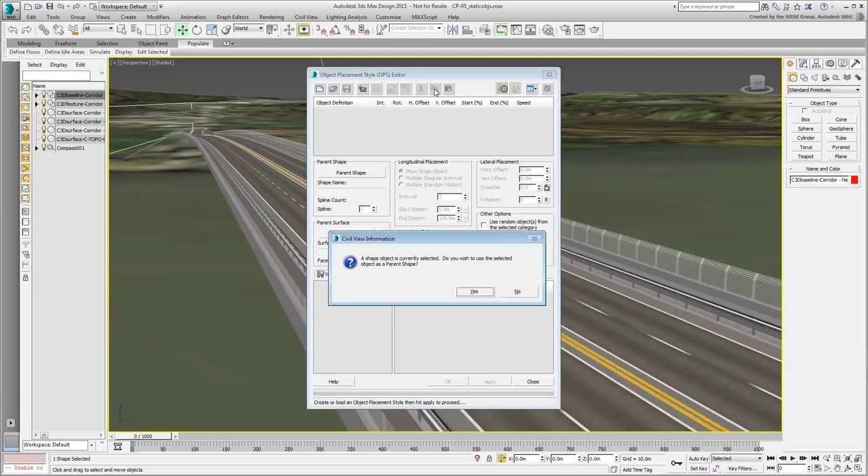You are asked if you want to use the currently selected spline as a base for placing objects. Answer yes to the prompt. Add a new element. The tabs at the bottom get filled with options. There are 6 tabs to choose from, each with its own subcategories of components. Components in each subcategory or group can be displayed in text mode or as thumbnails.

Currently, you are interested in the furniture category. That's where the lampposts and the gantries are. You will experiment with other components shortly. Under Furniture Lamp Columns, choose the 10-meter single column type, but do not apply it just yet.

In the Placement section, set it to Multiple Regular Interval and accept the default interval of 60 meters. The default works well for a 10-meter lamppost type. Note that a 12-meter lamppost has an 80-meter default interval, which suits that type.

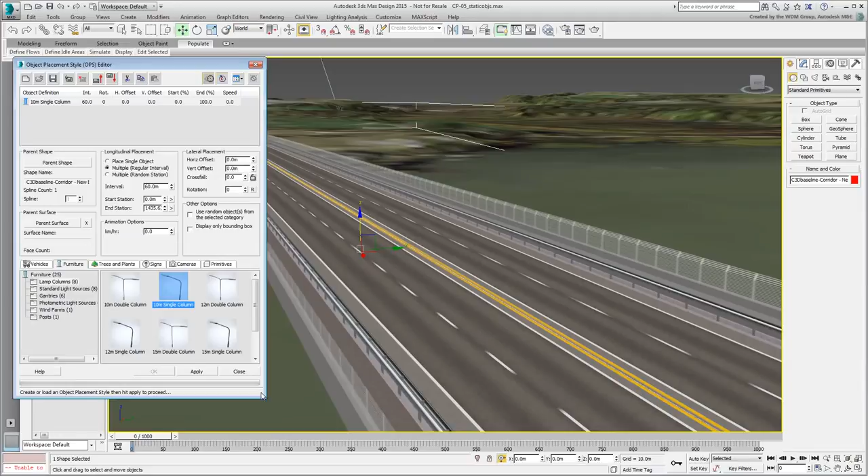Click Apply. Lampposts are now placed running along the center line. Obviously, you need to bring them closer to the sidewalks. Set the horizontal offset to about 10.3 or 10.4 meters and apply again. To duplicate the lamppost to the other side, copy and paste the element, and simply reverse the offset to a negative value. You also need to apply a 180-degree rotation to the duplicate to ensure the lampposts are pointing the right way.

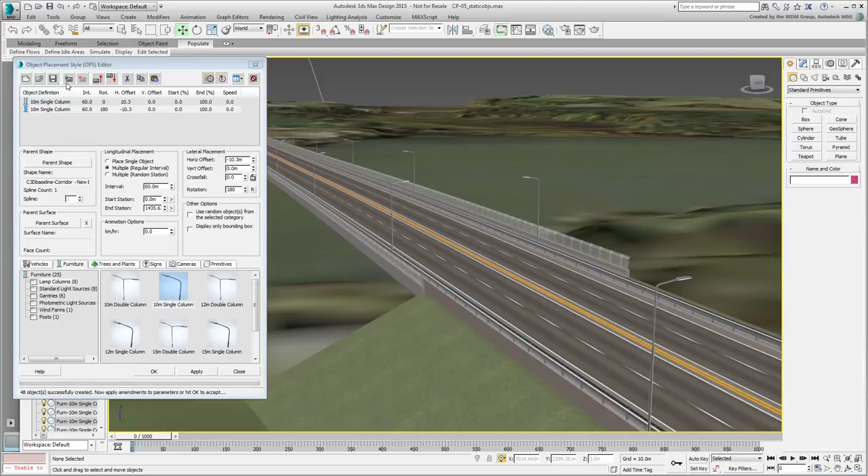That's better. Zoom back. Next, you apply a couple of gantries to the bridge ends. Add a new element. In the Furniture Gantry section, choose the NL 20-meter gantry. You only need 2, one at each bridge end, so make sure the Place Single Object option is enabled.

Click Apply. The gantry shows up in the viewport but is slightly to the side. Set its horizontal offset to about 10 meters and apply again. Much better. Now that you have the gantry, you can add a couple of signs to it. Add a new element and use the Airport 2 sign this time around.

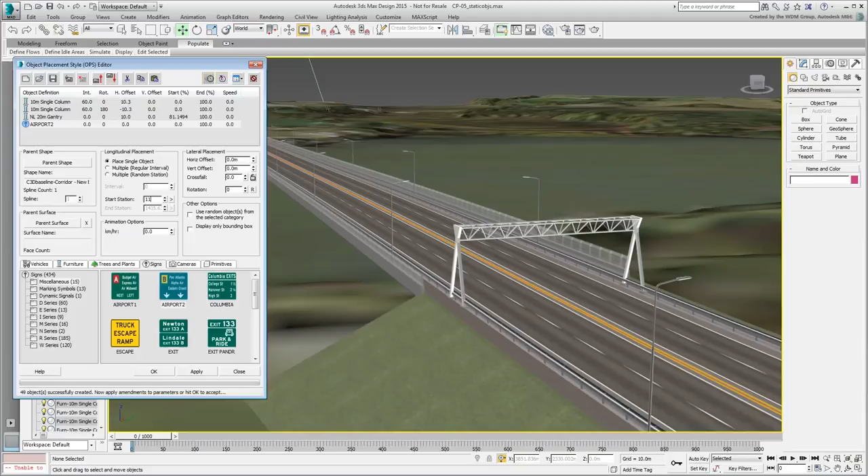The truth is, there are no airports in this area, but we'll use the sign as an example. Ultimately, you can create your own signs and other 3D components and add them to the library. You'll learn to do that a little later in the tutorial. For now, you need to adjust the placement of the sign. Set the start station to 1166 meters, just a tad next to the gantry. It also requires a few additional adjustments, such as 180-degree rotation, and some slight offsets.

You'll need a sign for incoming traffic as well. Add a new element and use the N-Series NB19 sign. Set the start station at 1164 meters and adjust the offsets for a proper placement.

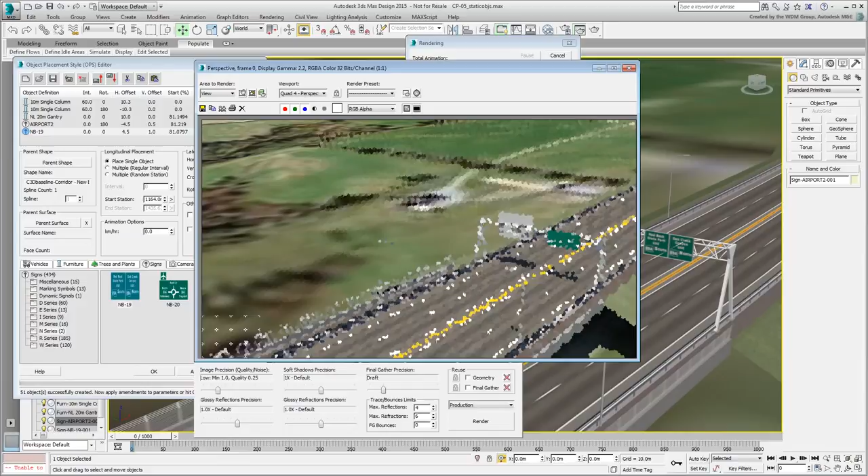Test render and note that these signs are set to render from one side only. The back side renders as gray. You still need a gantry on the other side of the bridge. Simply copy the last three elements and place the duplicates in the same order at the bottom of the list.

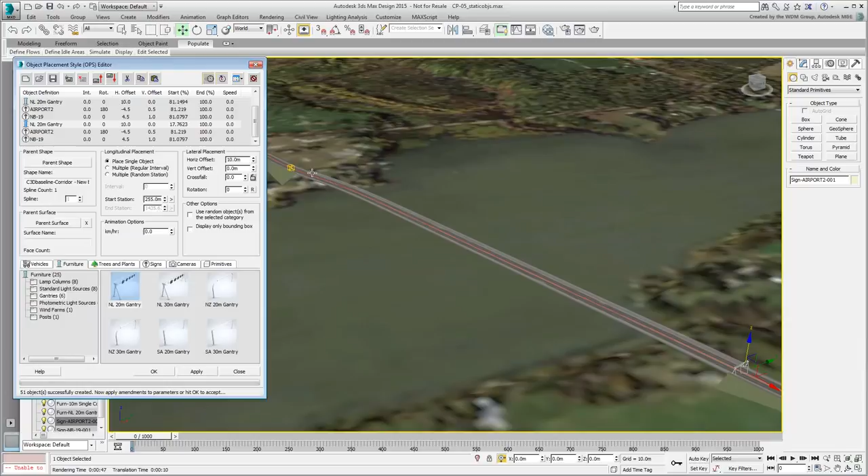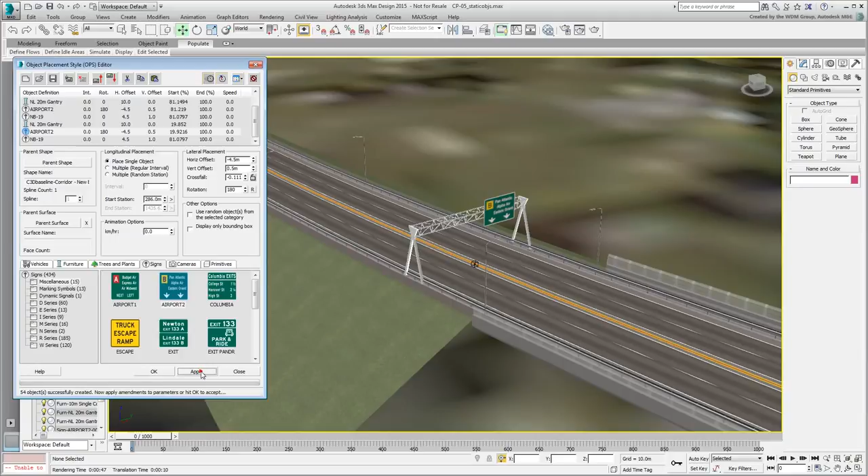The only adjustments you need to make relate to the start stations. So, the duplicated gantry, instead of being at 1165, should be closer to 285. The associated signs, being a notch before and after, should be at 286 and 284 respectively. Apply the changes. You should now have two similar gantries with signs located at each end of the bridge.

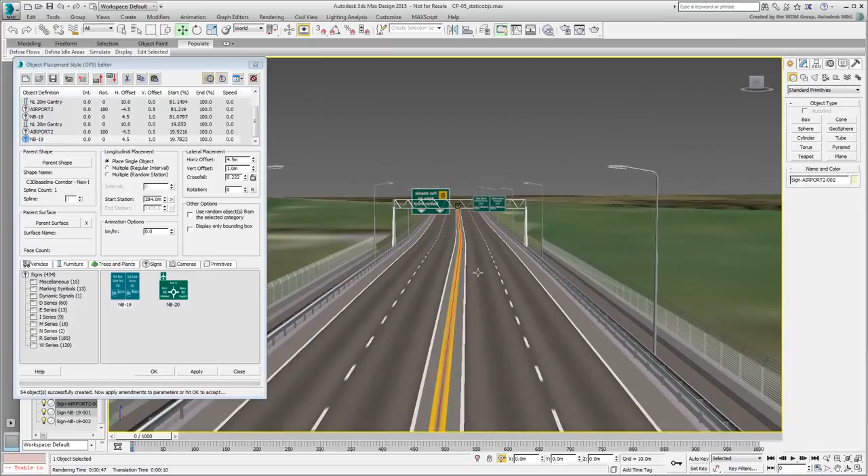Close the Object Placement dialog. You will be prompted to save the style you just created. Do so if you want. In the next movie, you keep experimenting with the Object Placement tool, only this time with animated objects. You will use it to place animated vehicles traveling at preset speeds. This will be your task in the next movie.